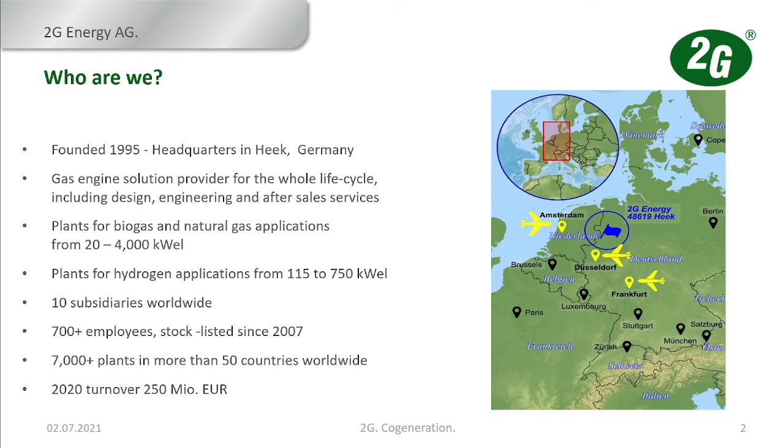So on the map that you can see on the presentation, you see we're just across the Dutch-German border, close to Enschede, so close enough for being part of this. 2G itself, we have nowadays 700 employees. We're stock listed in Frankfurt in Germany since 2007. And these days we have roughly 7,000 installed cogeneration systems altogether in more than 50 countries. On hydrogen base, not that much right now, but we'll show you some examples on the slides later on. So maybe this is the final slide about 2G, and then we come to the application.

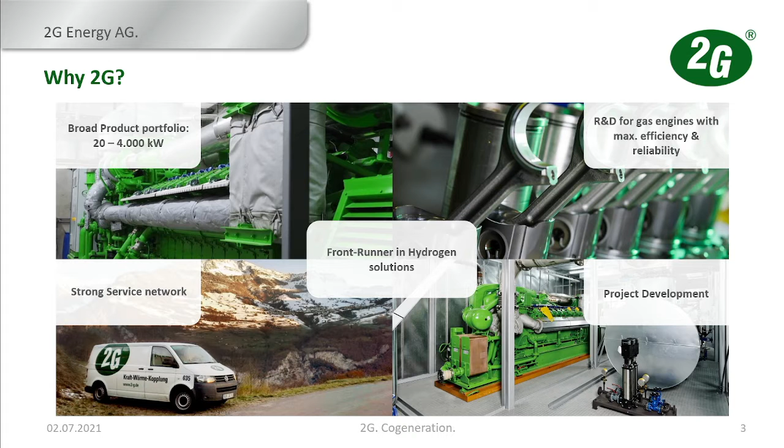2G has established itself as, again, solution provider for cogen systems in this power range 20 to 4,000 by our own R&D and development works, especially in gasified application, which brought us to the entire hydrogen solution. But of course, we're also quite strongly emphasized on the service and after sales, as well as in project development and implementation, which you will see on the next slides is quite an important piece of the puzzle if we look to, how did the EU lady call it, the demand side of the hydrogen.

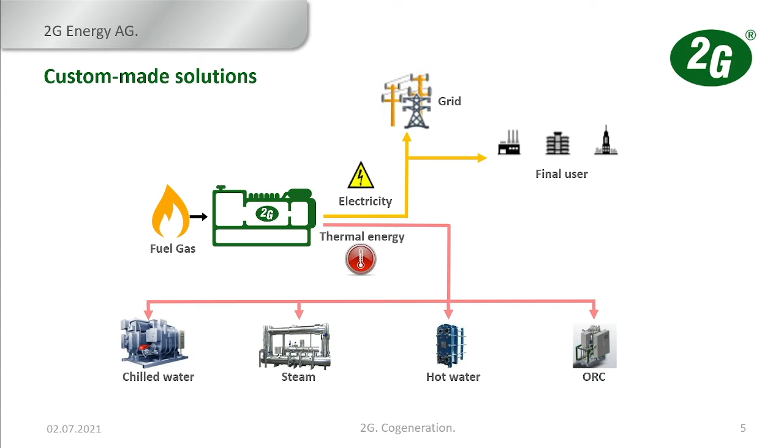And for people not aware what a cogeneration system, or in Dutch warmtekrachtkoppeling, I believe, does. We take the gasified fuel gas, and again, this can be natural gas or biogas or hydrogen, or even a blend, a mix of those, as was mentioned in the presentation of Hydrogen Europe earlier, and convert that at an extremely high efficiency rate, around 85% total efficiency, to electricity, either for direct supply for an end user, or for supply to the electricity grid. And on the thermal side, provided as hot water, for instance, or steam if we're talking about an industrial or commercial application, or even as chilled water if we talk about district cooling.

So how does the entire process look if we look at hydrogen? There was quite a bit of discussion and a lot of information today already about offshore wind power plants, about solar, about overseas imports, so you know all of that already. There's discussions about electrolyzers, so you know that as well. And even earlier this week, there was the green light for Gasunie here in the Netherlands to use the gas infrastructure for transport of hydrogen. So I'll just stick to the utilization side now.

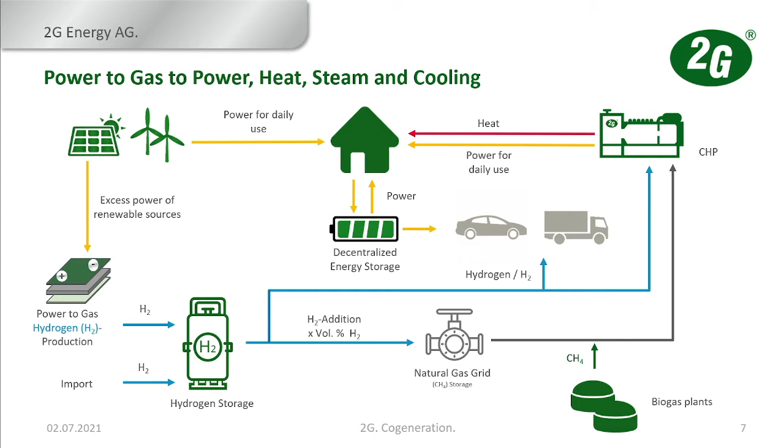And looking at gas engine technology for hydrogen, we basically have two approaches. One approach is, once the hydrogen is available, either produced at site or received via the existing gas infrastructure, we either use it as 100% hydrogen, or, without a change of technology, use a blend of 20% hydrogen, 80% natural gas, 50-50, 70-30, whatever is available. The engine technology is quite flexible there.

And of course, if you look at the bottom part of the slide, also the CH4 or biogas provided by biogas facilities injected into a natural gas grid, so biomethane, can be utilized as well, which makes it quite a versatile technology. So how does that work on an engine? And we heard it already in the previous presentation for turbines.

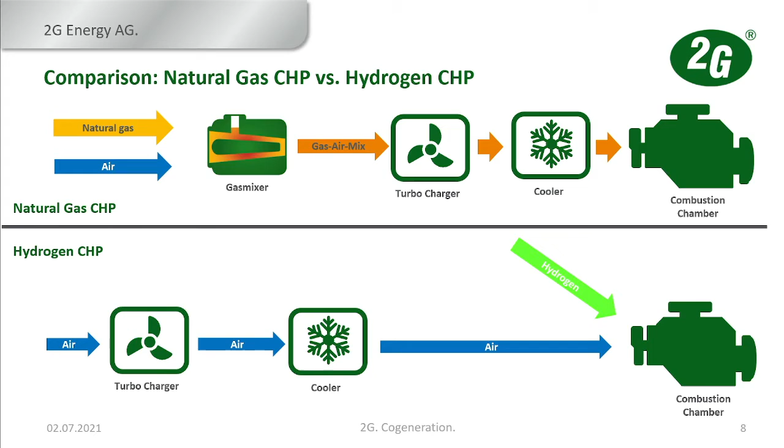On the hydrogen utilization, it's quite a similar process, with the major difference being that only the air is turbocharged and cooled externally, while the hydrogen is directly injected into the combustion chamber, so we do not have this premature ignition that we try to avoid at all costs. It's a bit more technical than that, but this is what it really sums up to: the switch from external air-fuel mixture creation to an internal one.

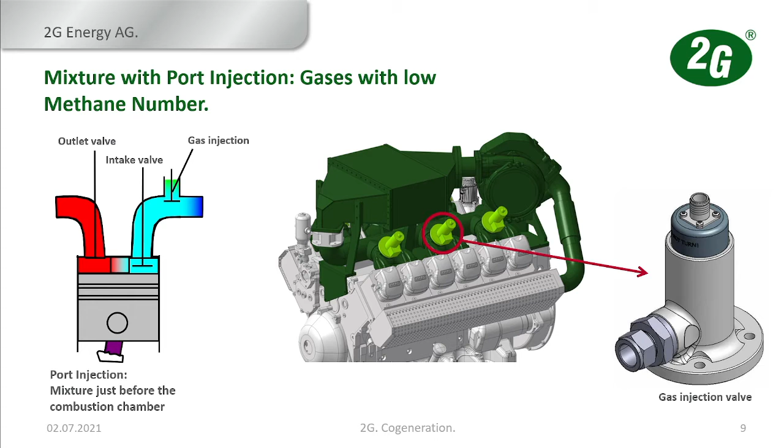That means even the infrastructure, not only the gas infrastructure, but also the power and heat infrastructure that is existing today and is implemented in the next couple of years, as hydrogen becomes gradually more available in quantity and lower in price, the transition can take place without new infrastructure investment everywhere, which is a big cost saver, we believe, for all sorts of customers as this transition happens, because it will not be a flipping of a switch. As we all agree, it is an ongoing process that will take the next decade or even more in executing that.

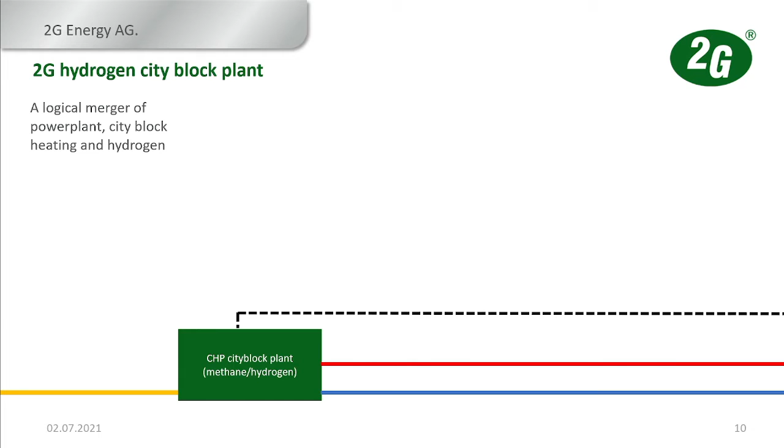From a practical implementation point of view, this is how we imagine this to happen in the future, for example, in the Netherlands. So we take the existing cogen system, for example, for city block heating or city block power supply that is today still based on natural gas or biomethane power generation, and supplies electricity and heat to the residential sector. This can be private houses, apartment buildings, schools, hospitals, whatever is connected to that district heating grid.

And of course, electricity will come from renewables directly when they are available. As we know, wind and solar have their volatile shortcomings where a storage technology is needed. And the gentleman from Hydrogen Europe was quite strong in his stance that batteries might not be the long-term solution for that, and we certainly agree on this.

So once hydrogen becomes available in larger quantities by whatever source, direct generation via electrolyzer or overseas imports, the yellow pipe, so the methane gas, changes to H2 at some point. It can be as a blend or as a full hydrogen changeover, and still we have the same infrastructure, and we can still reliably supply electricity and thermal energy to the local residential districts, companies, whoever is connected to it, and by that have the transition from fossil fuel to renewable-based fuel for the safe supply of energy and power on demand.

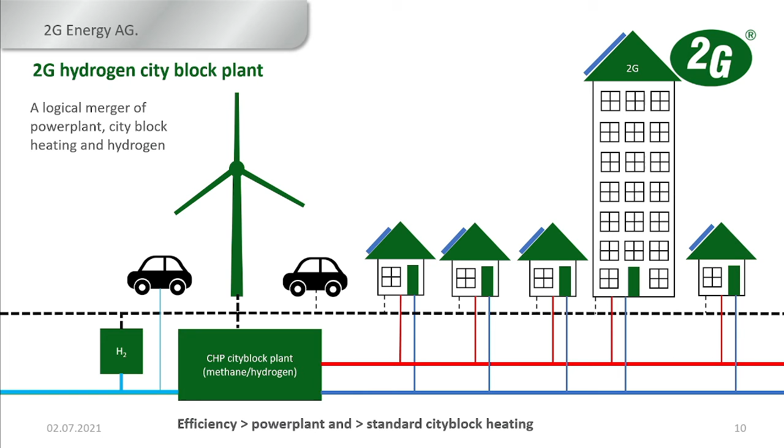That means we do not have to rely on the fluctuations that wind and solar naturally have, but can use the power when it is actually needed, which can even incorporate, with these two nice cars here, the mobility sector. So either as power for electric cars when it is needed, or you take it from the hydrogen grid and fuel them directly as fuel cell electric cars. So the versatility is definitely there with cogeneration systems, with gas engines being a part of it.

And of course, last but not least, it also helps manage demand and supply, because again, gas engine systems are flexible on shifting loads. They can do island mode operation. That means they can even provide off-grid energy supply in case of a blackout. And they help support the stability of the overall electricity grid, which are some of the more technical advantages on that side.

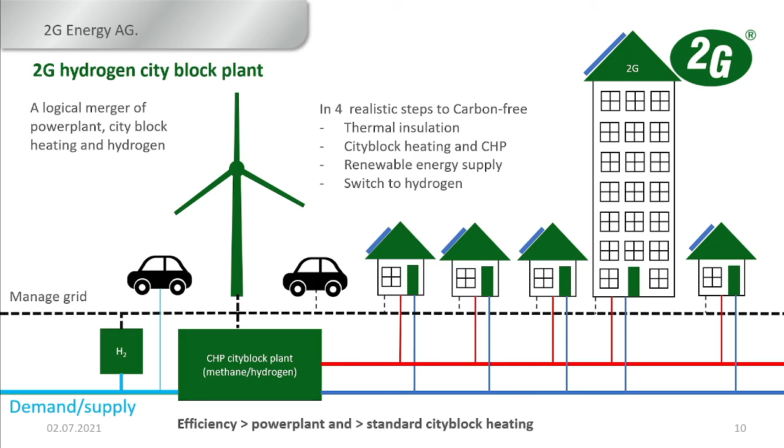And if we look at how to come to carbon-free heat and power supply in a living district, for example, as always, it's a concert of technologies. Thermal insulation on the buildings themselves, city block heating via centralized cogeneration systems, first on methane, then maybe on a blend, then on hydrogen, via renewable energy supply, and of course, along the entire way, with the emphasis again on not having to invest too heavily in completely new infrastructure, as Gasunie is going to do, as we are doing right now, as my previous speaker has already mentioned.

So you see this entire story. It's not just us, it's a lot of people following the same line of thought, and I'm happy that they're following the same line of thought. That means we're all more or less on track.